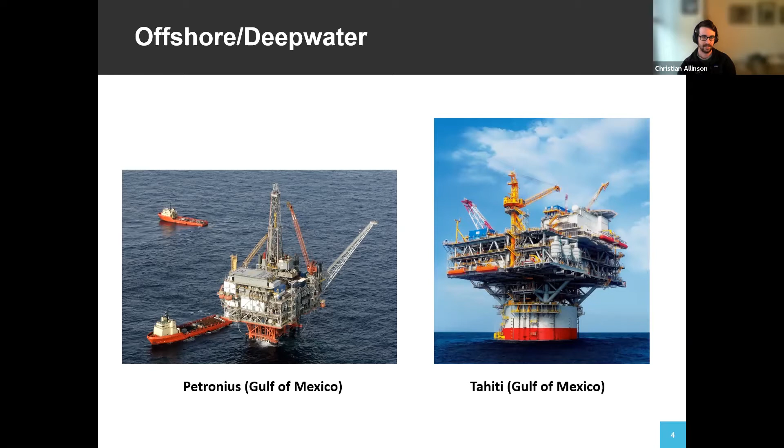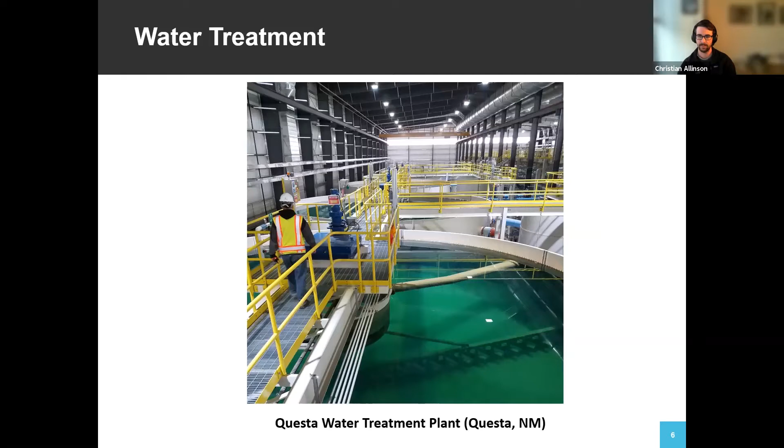So if you get into operations in industry, things kind of go into two different buckets. One is operations, the people that are actually running the equipment, making the product, and then the maintenance side, the people that are making sure that equipment runs. And from the project lifecycle perspective, if you're an engineer, maintenance is really not the fun part. The stuff is the fun part.

Without maintenance, you wouldn't have working assets, but it's not really a role that attracts a lot of people into it. It's not really exciting. A lot of it's a mixture of paper wrangling. You're looking at maybe your manufacturer's recommendations for how to maintain equipment, maybe some industry standards, just trying to keep a good plan going. And there's points where you really have to be kind of a hyper subject matter expert. So if you're a maintenance engineer working on things like fixed equipment or pipelines, you have to know a lot about corrosion and useful life of fixed equipment. It's not really the most glamorous part of the industry.

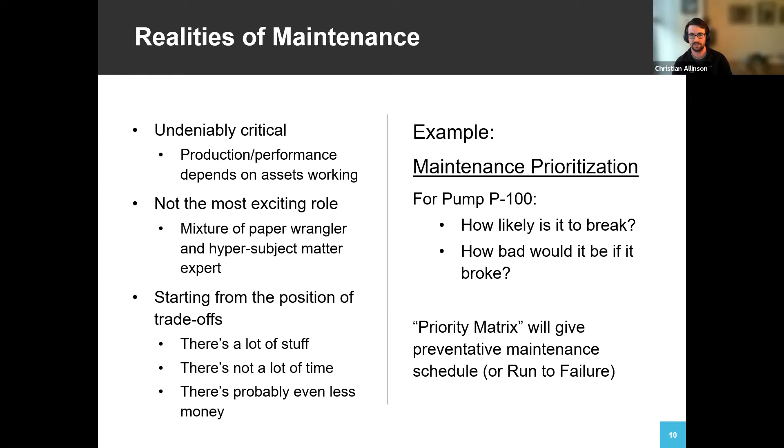What this comes down to is you have, on one axis, how likely it is to break, and on the other, how bad it would be if it broke. You're prioritizing—how much effort does this thing really garner out of the limited time and resources I have? Or is the answer that it doesn't get any attention at all, and we're just going to let it break? This comes into two different ways of setting up your maintenance organization.

Preventative maintenance is usually what people, or at least what I think of when I think of PM—it has enough criticality that it warrants continuing attention. Things like pumps, you're going to replace lube and bearings and stuff like that. Instrumentation gets bumped and calibrated to make sure it's actually reading the way you think it's reading. Valves that don't move very much, you're going to stroke test them to make sure they actually open all the way and close all the way when they need to.

Or there's the stuff you're just going to let run to failure—things like small dosing pumps, convenience instrumentation, things that are really expendable and just aren't worth it. They're either not worth it to the process, or not worth trying to stop from failing because it's so easy to repair.

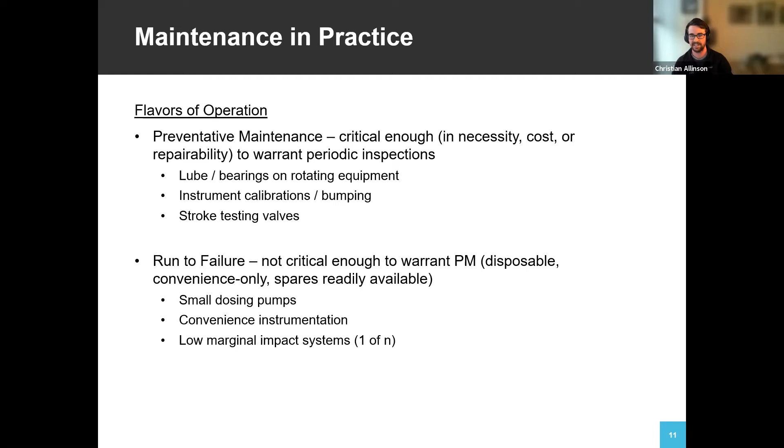Part of the consideration also is, say it does break, what do you have to do to fix it? This comes in two flavors as well. There's in situ repair, where your process can be running around you—maybe it's something redundant, or you can bypass it, or it's just nice to have—and you can fix it without any other mitigations in place. But what's more common, especially in complicated environments like refineries, is that you have to wait for something called a turnaround.

I don't know if turnaround is a common term in other industries, but in refining it's this event that happens every four to five years where you close the door for a month. You turn everything off, take apart what needs to be taken apart, fix it up, and put it back together. You hope you got everything done, because you don't have another chance for five years.

So this is the idea that you're going to be doing maintenance whether it needs it or not, for critical pieces of equipment that you can't run the process without—things like big electrical feeder circuits where you're getting all your power from, some utility and control systems, or stuff you really can't do anything with while the rest of the process is running.

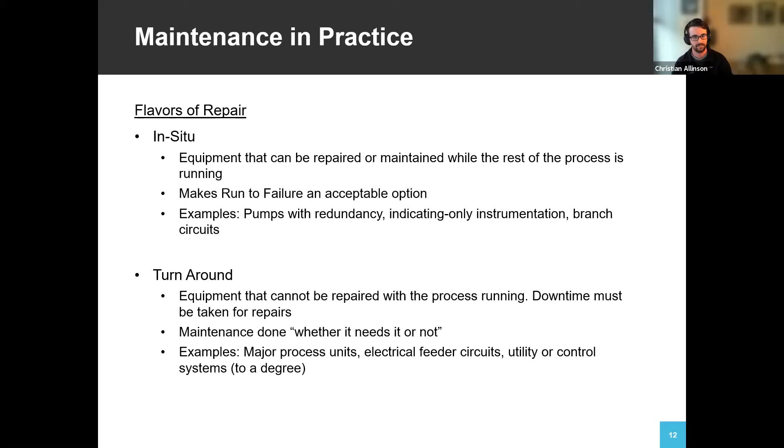The mesh of all these things together creates a maintenance environment that's very, very not optimal. The stuff that feels more important than the mean gets pushed to a higher tier—we're going to put more attention on it, make sure we're looking at it, repairing it when we get the chance. It's not going to break, or we're not going to let it break. We're just going to keep it moving.

And the stuff that feels a little less important than the mean, you just let it break. So you're pushing these two things to extremes, and you may not actually be repairing things that are on the verge of breaking. You may be wasting time, or having things break that you're really relying on noticing and being able to find and repair.

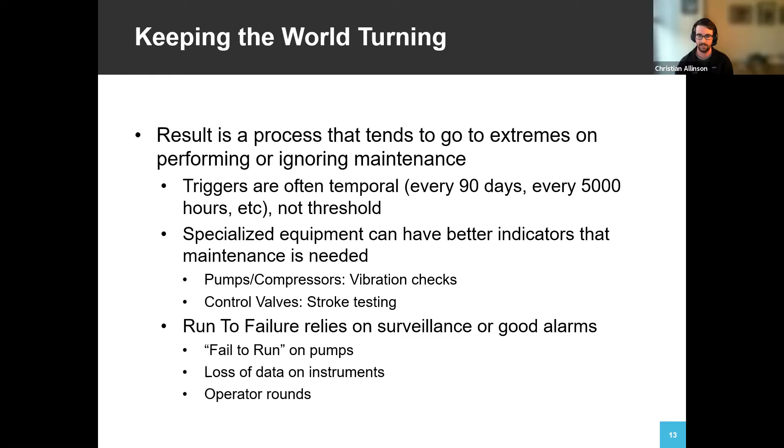So it feels like there should be a better way to do this, right? We shouldn't have to just rely on preventative maintenance or run-to-failure as the only two decisions. Especially with where industry is today, it's not like there's no data out there—the digitization of industry is decades old.

Many of the sensors deployed right now are very smart. They can do some form of self-diagnostics. They can tell you if things are about to go wrong. A lot of important equipment, like big compressors or pumps, have very sophisticated monitoring systems—vibration monitoring is common on big equipment, looking at the vibration frequencies, and shutting it down if things are about to get bad. Digital control systems are also prolific. Anything you really want to measure and collect, you should be able to.

I used to sit in my office in Houston and watch what they were doing in offshore Angola in real time. This data gets around, and it's not like the algorithms or means to do some of these things are absent at all. Even simple regressions are out there.

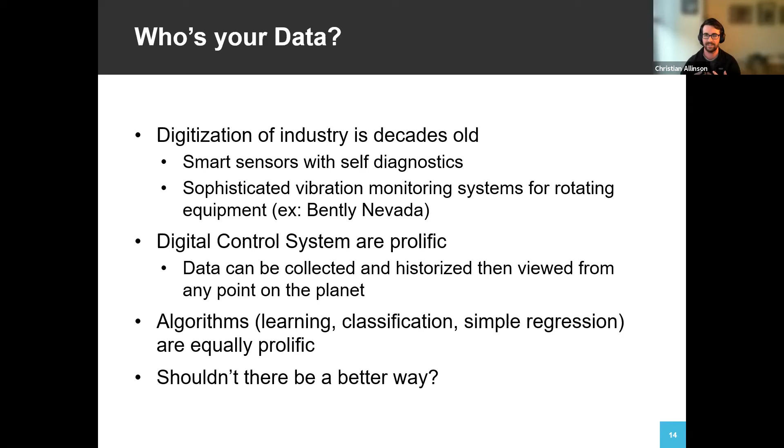Learning methods, classification methods are equally prolific. So shouldn't by now all of this have really come together to make something better? And that something better should be predictive maintenance, the other PM, where the idea is that you're not just trying to keep things going to prevent a failure, but you can actually predict when a failure is imminent and do more of a just-in-time repair.

And there are obvious benefits over the normal status quo. Over preventative maintenance, you're reducing the kind of low incremental benefit things you're doing. Like in a turnaround, you're not doing this repair just because you can't for another few years. You're not really sure if it's going to fail in the next 5 years, so you're going to do the repair and hope for the best.

And the obvious benefit over run to failure, where the stuff that's kind of forgotten until it goes wrong, you can now bring it back into the fold and make it part of some sort of monitored maintenance plan. So the idea with predictive maintenance should be that you're making the whole thing a little bit more optimal.

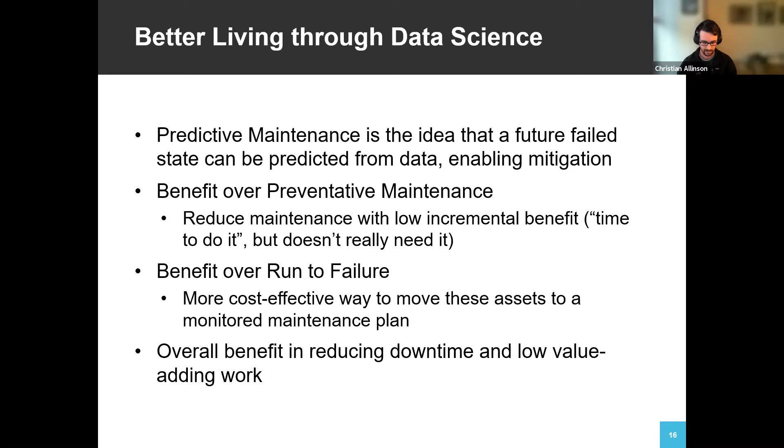You're not wasting time on things that don't need it. And with some of that time you buy back, you can put it on things that you otherwise would have just forgotten. And say that you're like me, you're an engineer with a hard hat, and maybe you're not super up on data science or machine learning techniques.

You think there should be some products for this out there, right? And the answer is yes. For one, MathWorks has a predictive maintenance toolbox that goes in MATLAB, and it provides kind of the things that you would expect from maybe a predictive maintenance platform, some nice histograms and stuff.

There seems to be a very focused angle on rotating equipment, so there's a lot of stuff about vibration and bearings and gears in there. But also think about how MATLAB and what MathWorks is putting out is very generalized in terms of the breadth of industry and users it serves. So this isn't a toolkit that's really made to plug into industrial automation systems. This is a very broad-reaching thing.

So there's probably a lot of work that needs to happen to get this data in, and once predictions are generated, get it out into a way that works in our normal workflow, like if it's a work order, whatever. So shouldn't there be other things from other vendors?

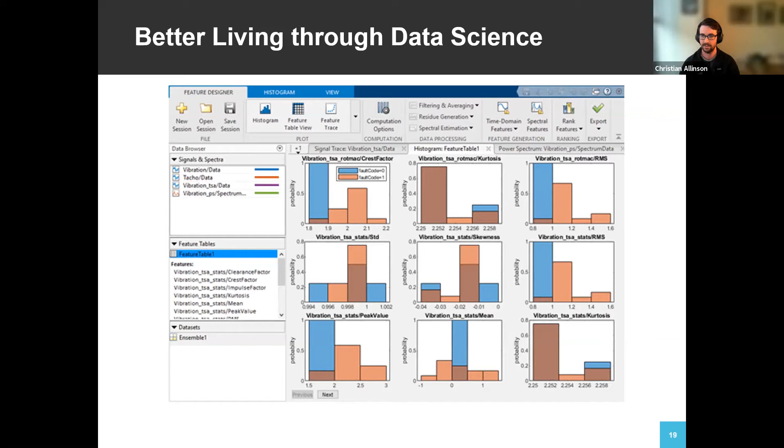So looking at more of an automation company, Rockwell Automation loves to tout that they are used by the top 80, 90, 100% of the top clients in industry, and I believe them entirely. And they've tried to tout some things like an innovation suite, realizing the full value of predictive maintenance. But if you actually try to figure out what they're doing and what that actually means, it's pretty hard to.

All their links are dead. So it seems like even though they recognize that this is at least a business opportunity for them, they don't care enough to actually keep it up.

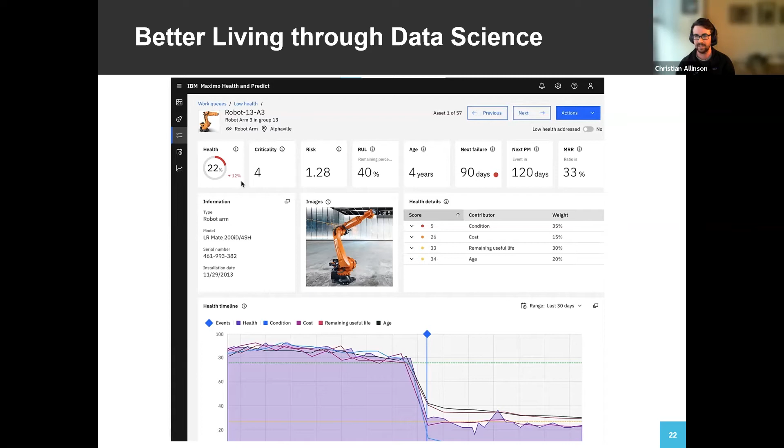So it's kind of like your running record of all your assets, and this looks pretty cool. You can see there's a criticality, there's a risk, even a prediction of the next failure. So great, problem solved, right? But this means that you have to kind of buy into the Maximo ecosystem, which is not a trivial task. This isn't really like a small plug-in thing that you can choose.

I was trying to think of an analogy, and deciding to go with Maximo just to get this toolbox is kind of like deciding you're going to move to France because you want to drink wine. It is an answer, but it's not something that's taken lightly.

So there's stuff out there. And if you then ask, is anyone using them? I think the answer is not really.

So I worked in central engineering for Chevron, and our scope was the entire company. So my years there, going to industry conferences, talking to many vendors, there doesn't seem to be many really good foundational products or solutions that enable predictive maintenance. And of the ones being used by people, they seem to be very niche and very high touch. So in my time, we did not have really what you might consider learning models for predictive maintenance at all.

And why is this? I mean, we seem to have plenty of data or the ability to capture data, and there seems to be plenty of things we can do with that data. So why isn't it being done? In my mind, it kind of comes down to two things.

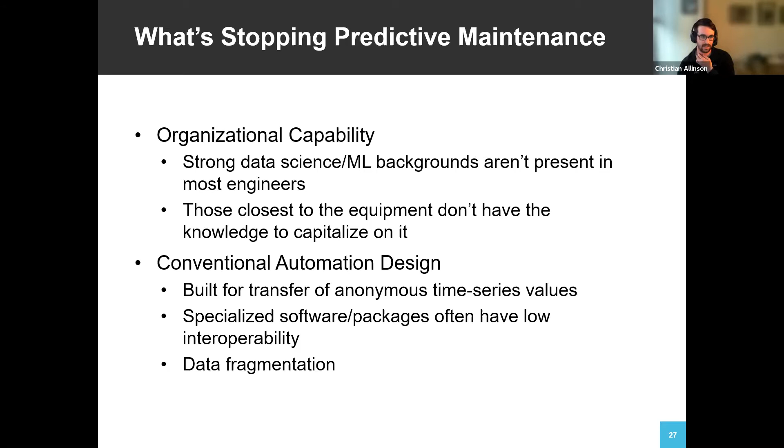And the last piece is data fragmentation. That's the idea that you have all these pieces of data that kind of relate to the health and life cycle of your asset, but they're just all over the place. I'll give an example of that as well.

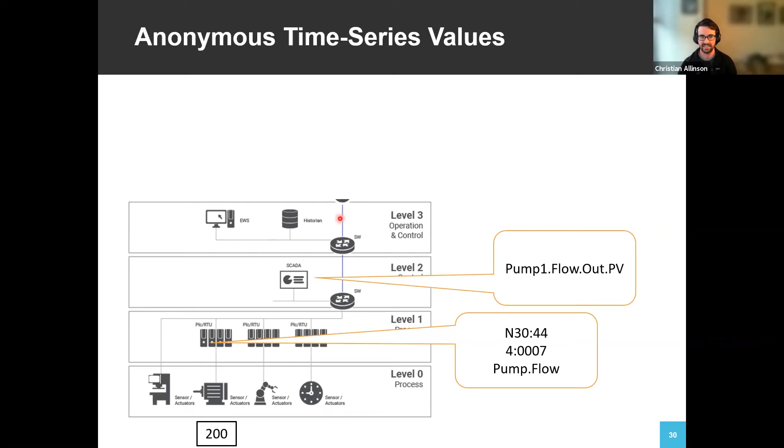Modern systems do have text-based tag names, so you can get some context. But then if you look at it from this computer system, which is maybe like a computer in a control room that the operators use to watch the pump, it has a different name. It has something called pump1.flow, pointing to this controller and this piece in memory. Maybe since there's more than one pump, they're adding some elaboration on the tag name, but really it's the same thing. You're pointing to an arbitrary space and getting a number, and up here, kind of disconnected, assigning it context. And it only gets worse the higher you go up. You're storing this stuff maybe up here in a database, and this database probably covers more than one plant.

So now you're adding more context to it. And really nothing is actually consistently connecting these things together, except this long line of pointers back to this number 200. So it gets hard, especially as you expand, to keep track of what all is going on. The context of what stuff is doesn't really flow through the system. It's a very manual effort.

So you have your description, your engineering units and stuff like that up here. But if you change something down here, this is all going to point to that piece in space, and it might never get updated. So that's the idea of this anonymous time series value passing. You're just passing this number 200 around, and by sheer physical, human effort, keeping it all consistent.

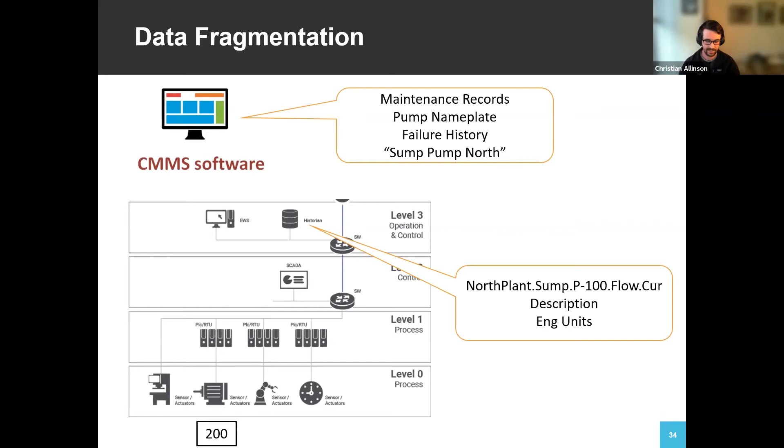And to make things a little bit worse, like we talked about your maintenance system, say you have all your maintenance records for that pump in here, it has all that information, has nothing to do with the values getting recorded. It could be called something else entirely. So just this data fragmentation of all these places where you have information that could be useful for predictive maintenance, but it's spread out over different places, and there's nothing internally consistent keeping it all together.

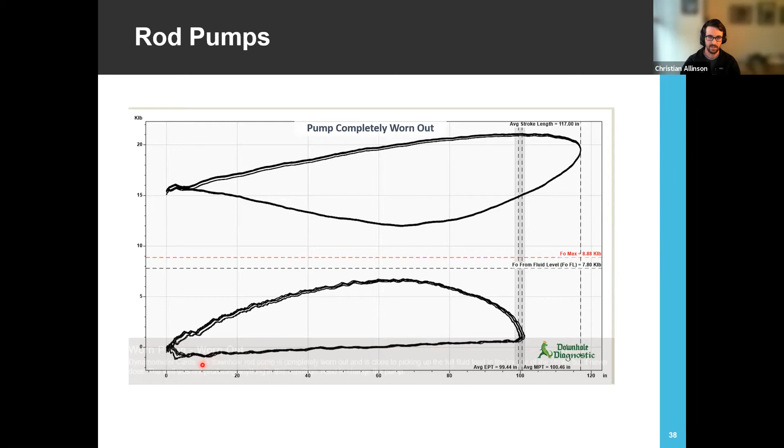So this is a good dyno card. Everything is flat and happy and stable. So maybe this is the upstroke and that's the downstroke. So this is a perfect card. But if things start to go wrong, the shape of that trend starts to change. So if a perfect rectangle is a good card, this is a worn out pump. And maybe there's something else, like this is from a hole. So looking at these cards, you can tell pretty quickly that something's different, and these shapes and patterns are consistent for a common failure mode across different pumps.

So this should seem like a prime opportunity to do, if not just an image classification to say what these cards are doing, maybe some predictive maintenance. This card's probably not going to change in one stroke from a rectangle to a little wing. It's probably going to deteriorate, and you can use that to do prediction on failures. So the benefit of this would be massive.

When I was working for Chevron in the Central Valley, we operated over 10,000 wells, which means we have over 10,000 pumping units out there continuously making dyno cards. And they run about 25% of the time. And I think a stroke takes about 30 seconds. So you can imagine how many cards are produced every day, let alone every week or year.

But we're not really doing much with them. An engineer will look at it occasionally if they have reason to believe that there's an issue with that pumping unit, but it's kind of an eyes-on activity. They have to specifically look at it and interpret what that card's telling them.

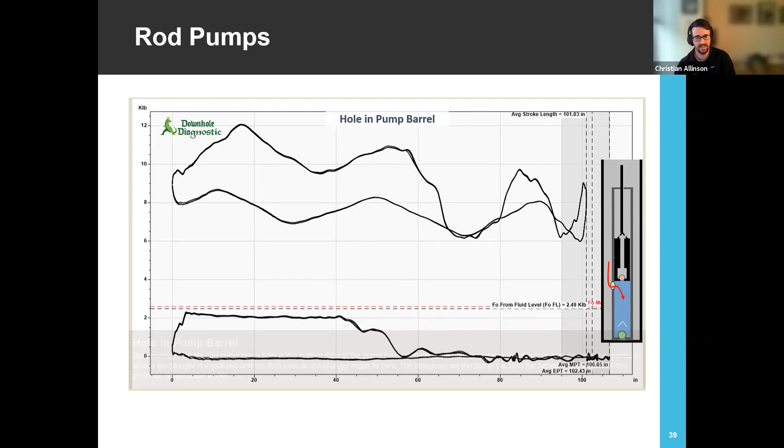I guess a stroke takes about 30 seconds. And if you look at a card, I'm going to guess 100 data points over 30 seconds to really recreate the shape and do something useful for it, maybe more. If you're lucky with typical industrial radios, you can get one value, if you're really lucky, every second. More typically, you're getting it every 15, 30 to 60 seconds, which means that the data throughput just isn't there to be able to recreate that information.

So it's not a function of information not being there or available. It's really that the connecting pieces to this, even though it seems so obvious, have not been expanded or really fixed to enable these what seem like pretty obvious techniques to do predictive maintenance, let alone just kind of health recognition.

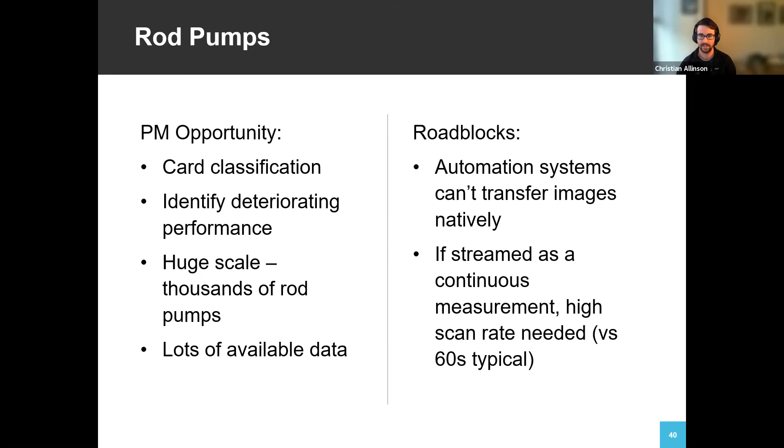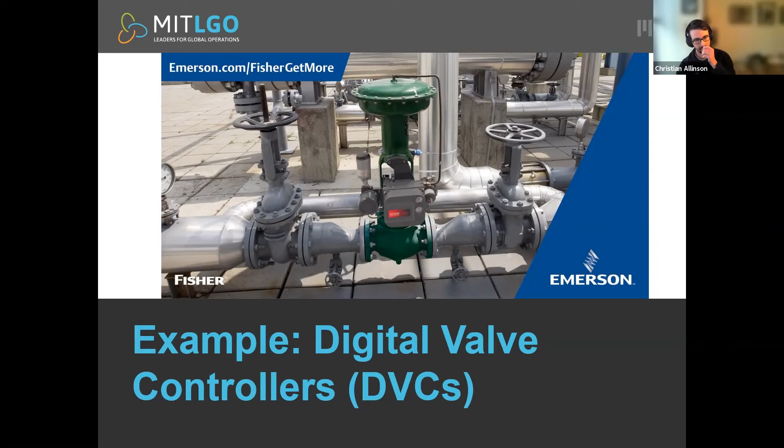And they are incredibly intelligent as far as end devices go. They have a large degree of internal measurements and diagnostics, not only to describe the state of the controller itself, but actually the state of the valve and the physical pieces.

So if you think of a valve, stiction is a big issue where, if the stem starts to stick, you have to add a lot more air to actually make it move, or let off a lot more air than you tend to see to make it move. You might get this big swing if your valve stem's sticking. That's an indication of failure. All this other stuff about the little solenoid electronics and stuff. So a massive amount of information in these things.

And valves are, especially in downstream and chemicals, incredibly important to safe operation. If you have a safety valve or certain process control valves that maybe live their life in one little band, and there's an event where it needs to go full open or full close and it doesn't because it gets stuck, you could have catastrophic consequences. So very, very big reasons to make sure that your valves are reliable.

So there should be all kinds of information that you want to look at in these valve controllers to make sure things are going on. And it pretty much labels the data for you. This thing gives out alerts saying that there's pressure problems or stiction problems, all that kind of stuff you can use to do any number of supervised learning. And it's really, really scalable. There's very few models of these DVCs used. So if you crack this for one or two types, you can apply this to hundreds to thousands of valves.

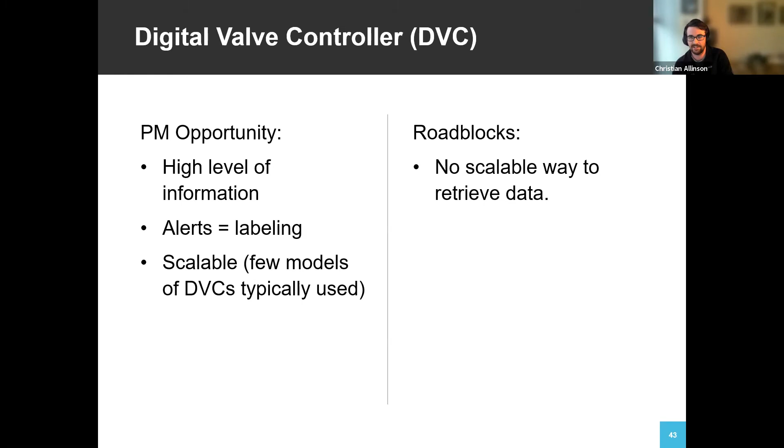And again, the question is, why isn't this done? And the answer is that there's no scalable way to retrieve this data. Not really any at all. And the reason for that is, again, these anonymous time series values that everything is built with in mind. Instruments, even today, are almost universally connected by a 4 to 20 milliamp current loop. The instrument or device will modulate that current to communicate information. Usually it represents a signal between 0% and 100% of span.

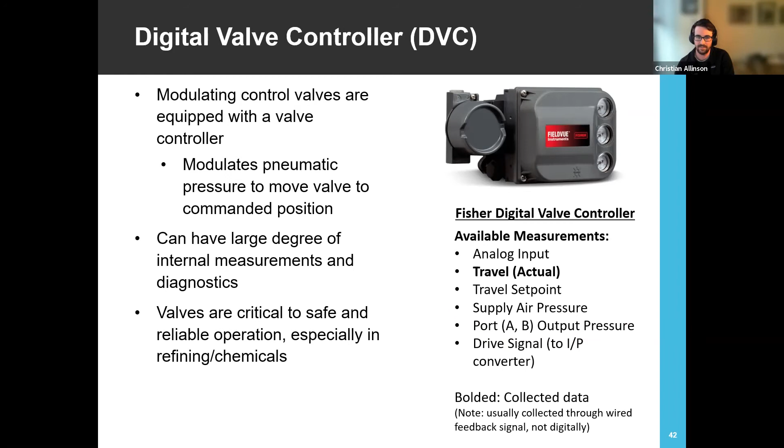There is a way to digitally superimpose some information on top of that current loop, and it's called HART. Very common, very standard in many things. But the problem is that HART also focuses on anonymous time series values. There's 4 primary analog variables, that's kind of the bare minimum of HART. You can get those 4 primary variables back and forth, but looking at this, there's not 4, there's more. And depending on your device, there could be many, many more. So with the standard way of using HART, you're restricting yourself to only a subset of information if you want that stuff out.

And kind of what these diagnostics are in these devices for are for the technicians, but they're not really meant to be collected, and they're not really meant to be historized. They're meant for a valve technician who walks up with his handheld communicator or his laptop, can punch open a little application, and it'll tell him everything that's going on. And it's supposed to be used just then and there, and then it sits on all this information until the next technician comes up and punches it in.

So there's some solutions for getting this data scalably and historizing it, but very few, if any, are actually in active development. And this is just one example for one class of device. But if you think of arguably any industrial device you have that's doing measurement or control in some way, it has the exact same problem.

If you think about what's running a motor, if you have a motor protection relay that knows the voltage and current that's going into that motor. It might even have power factor or be wired up to the things measuring temperature inside the motor. It has all this information, but usually the only signal that comes out of that thing is the motor's running and if it tripped, because that's the only thing the operator needs to know about. So all this stuff is really designed around what does the operator need to see.

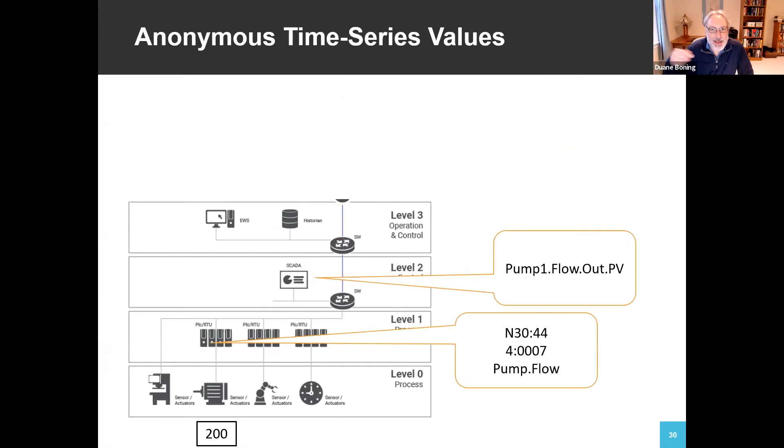I have a question. This is great. Just the challenges throughout the whole stack are amazing. Do you think there's any opportunity to leverage consumer devices, home automation systems, home devices, or something like that, where there's a bigger driver and maybe they're evolving on a faster cycle, to then leverage that towards industrial applications?

Yeah, I really think there is. And I think that's been appreciated, at least it was becoming so when I was at Chevron. This slide kind of gives you conventional automation, where the idea is that you don't want to have anything exposed. You're keeping everything really low down. It's kind of like two tin cans and a string is what you can pass information with through your firewall, because you don't want people coming the other way and reconfiguring stuff and potentially causing loss of life.

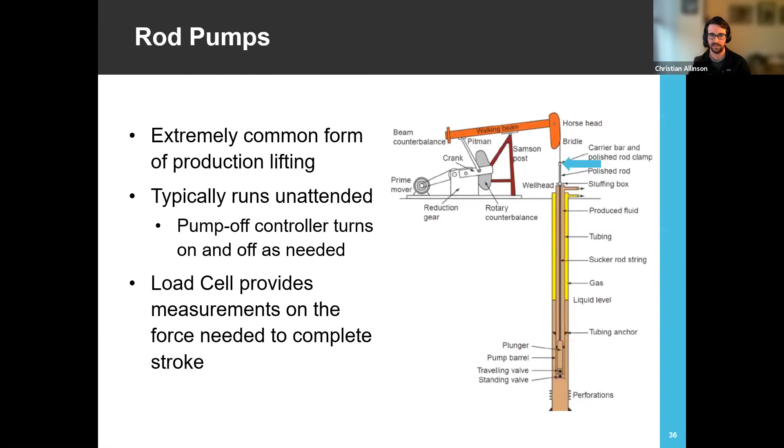So that makes the consumer stuff kind of restrictive, where a lot of development is cloud connected devices, using common carriers, cellular, stuff like that. So what I've seen is this parallel box that we're starting to say is acceptable. Everything on this side is integral to the process and the process safety, no cloud, cellular, whatever. But the stuff that's more nice to have, like maybe dyno card data, where it's just telemetry, we can use all those consumer things for.

And I think I've seen a lot of that with MQTT as well. I think all of the big companies that are embracing IoT, you know, as a service or just supporting it, they're using MQTT because it brings benefits. And there's a blossoming ecosystem of devices that use it for industry. So I think that's correct.

I think it is that stuff that's coming back from the commercial space. It's a mixture of what actually passes the test of being able to withstand the industrial space. That's, you know, a product problem. The other is doing it the right way so that you're not creating safety or security issues by implementing them.

Yeah, because it also reminds me, I'm trying to remember what conference it was, but I heard an excellent keynote on embedded devices at one of the circuit conferences. Luca, you might know, it was ICCAD or DAC or something like that. And it was a talk by companies working on embedded devices, especially for consumer things like your handheld electronics or your DVD player.

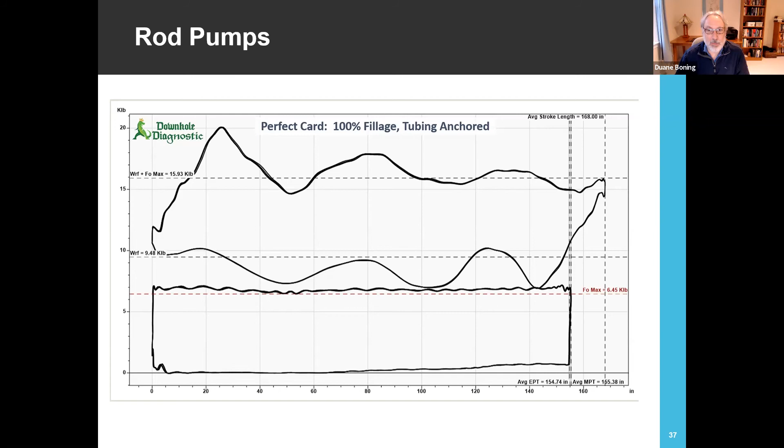So there were a couple of these companies trying to have the packages or the design infrastructure to embed such things in consumer electronics that might also be transferable, because it becomes the same problem of much more appreciation about security, privacy, need for encryption, and so on. So it just reminded me a lot of that talk.

Yeah, and those are things where we had almost not incidents, but kind of opened up a door we shouldn't have. It's not in any of these pictures, but on these pump-off controllers there's usually one radio that goes to our system. And this is kind of a war story, but another team said, well, we want more data, the stuff you guys aren't collecting. And the vendor said, oh, we can just pop on our radio, collect it, and give it to you as a service.

Like, great. So this is a group that doesn't have anything to do with security or IT or automation agreeing to do this because they own these pumping units. And what has unintentionally happened is that a third-party service provider is sharing wires with us into our process control network. So yes, it's really easy, but if it's not done the right way, you've crossed the streams of security and insecurity.

Question: how impactful do you think a really strong case study would be to spur hardware and software upgrades that would allow for this data to flow?

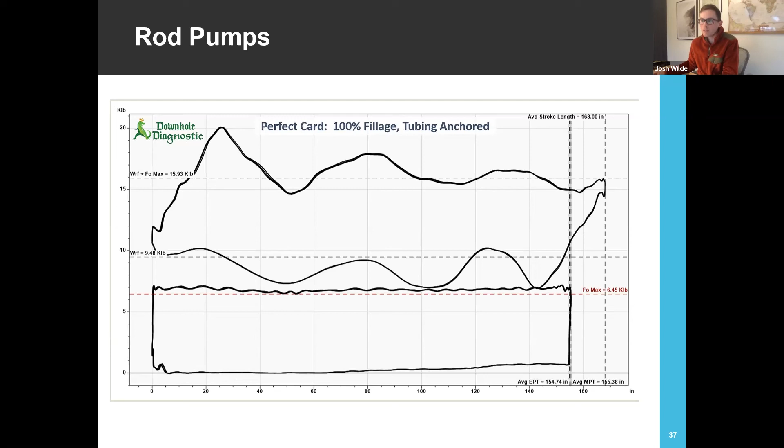Gotcha, maybe that's what everyone's thinking. I think the other question is, do you upgrade it to what? Well, okay, so that's what I was wondering. Yeah, is the technology not there? Yeah, I don't think it entirely is. I think the closest you get to it is stuff that feels more consumer than industrial, and it is hard to get it completely vetted.

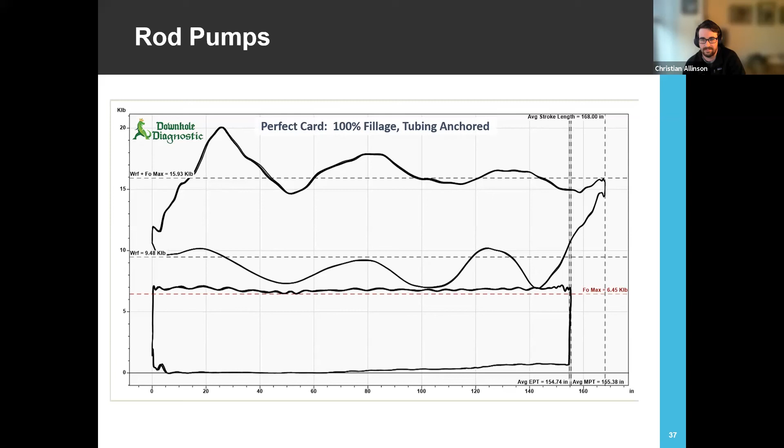You did mention that sort of ecosystem that you could buy into at the beginning. So, do you think it would take something like this in order to get good data organization structure adopted, or do you think it could slowly be built up over time? I think it could be built up over time.

Because just the way this is designed, it's just an incredibly manual effort of pointing things at each other and then trying to remember what it means at the end. So I don't think the answer is necessarily Maximo or a system like that, because that doesn't really solve this problem, where the state and the context and the identity of this device is hand coded all the way up until it gets to wherever Maximo lives. So I think it could definitely be a good platform to get all that stuff together and actually have one pane of glass, so to speak, to look at for everything. But I don't think it's actually solving the problem of all that context not coming with it.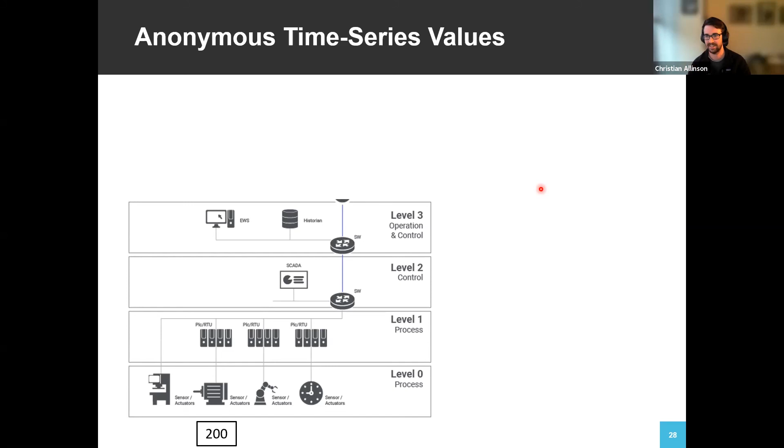That's in my mind like a 1,000% improvement over what was being done, which was when a controller is added in the field, you have to specifically create tags here with the idea of pointing at health data. And if it times out or goes bad, I've configured an alarm and someone's going to notice it and do something about it. So that was a top-down approach, and it's just not that sustainable. I think bottom-up is the right way to do it.

Gotcha. That makes a lot of sense.

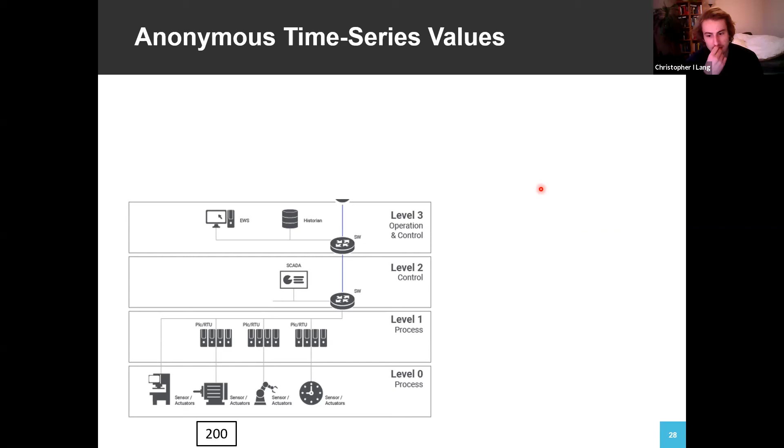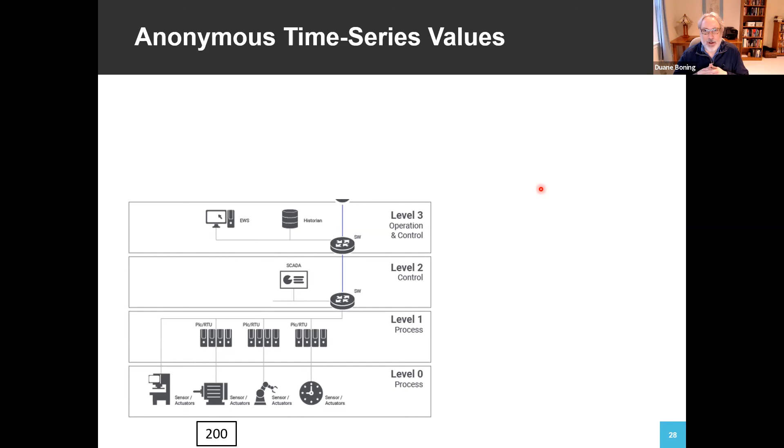Any other questions I can answer or thoughts? You mentioned the use of radios and so on. It seems like in especially these large scale kinds of operations and plants, you need some kind of wireless connectivity. Is that just a good assumption here?

Yeah, that may even be true in a factory, by the way. Out here, I was lucky that Kern River was fairly - I'm not going to say it doesn't have a lot of hills, because it obviously does, but it doesn't have as extreme terrain as some of the other fields did. But all of these, you can't really see it - like this tiny little tank right here has a programmable logic controller on it.

All of our PLCs were on Ethernet radios, so we just plugged it in - it was like an Ethernet bridge, and we could pretty much get any data we wanted. So all of the remote sites are connected with Ethernet radios. If it's a critical enough thing, it'll be hardwired with copper or fiber. All of the pumping units, though, were on serial radios - much lower capacity to transmit data and a lot more congestion on the network, because as you can tell, there's thousands of these things. So yeah, radios are definitely out there.

I think the connection medium wasn't always the problem, because if it made sense to put something on these pump-off controllers so that we could have the bandwidth to send image data, we had the technology there. It's just that little controller can't represent that as an image to something that can connect to it on the other side and pull it into a historian or something like that. So yeah, there's definitely wireless out there.

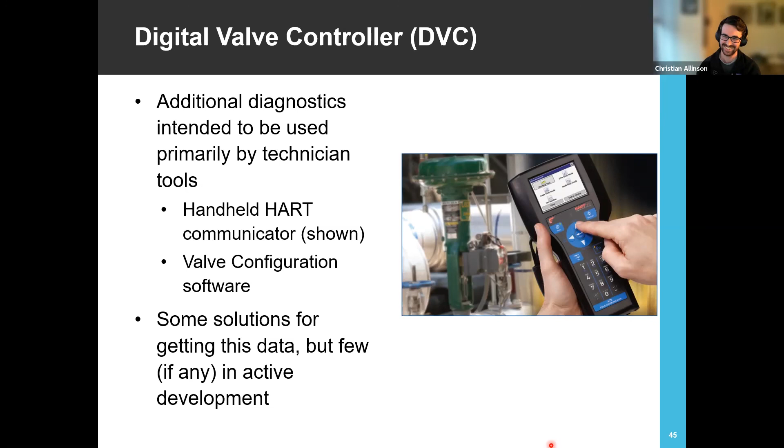Well, the one thought is now we know more about your expertise, we may be coming back to you on thoughts or something on some other projects. There's a couple that may even be vibration. As you can tell, my absolute favorite. Yeah, but yeah, so this is great. Thank you very much. Cool. Well, thanks everyone. Thanks.